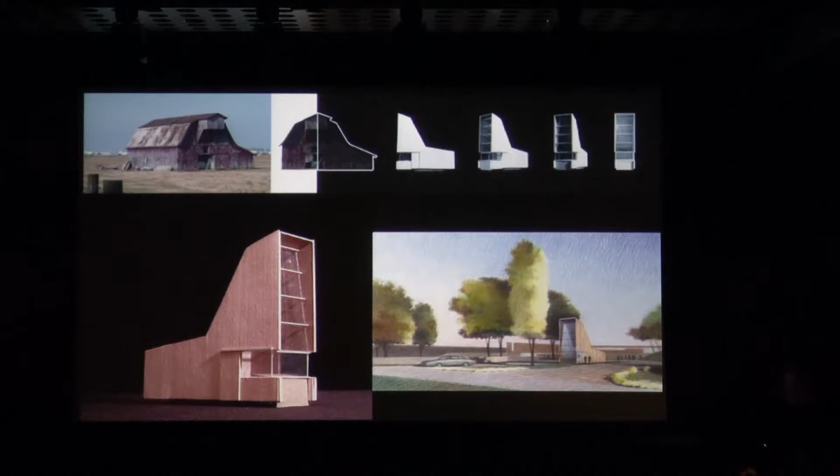I think it's safe to say that most architecture isn't very good, and most good architecture is good enough for most days. But there is some architecture, some buildings that need to rise above the everyday, and I think this necessarily challenges us to return to the significance of the everyday and revalidate it through the things that we make. So what we've been doing very much is choosing to work between the motivating forces of the everyday, where the inadvertent meets the purposeful.

We've developed this set of operations that really assist us in this task of recreating strangeness, to represent the world as it's given to us, into the world as we find it.

Simple things like you see here, of finding forms in the world, and then just by representing them, we can reprogram them. We can begin to introduce something that is at once connected to its place, but also part of a universal language, a larger global discourse. So it's a productive tension between the local and universal, and that's very much what we're after—always looking for analogous relationships between what is nature-made and what is man-made, as a source of ideas and possibilities.

Very early on, in fact even as I was a professor here, I was developing a series of prototypes. I didn't have much work at all, just out of grad school. The opportunity to teach at Syracuse gave me time to really think about how we build in the landscape, how we might begin to think analogously about things that are more inanimate—say industrial or pre-industrial—and things that are more organic, and really begin to mix and hybridize certain typologies to develop a new way of occupying the landscape.

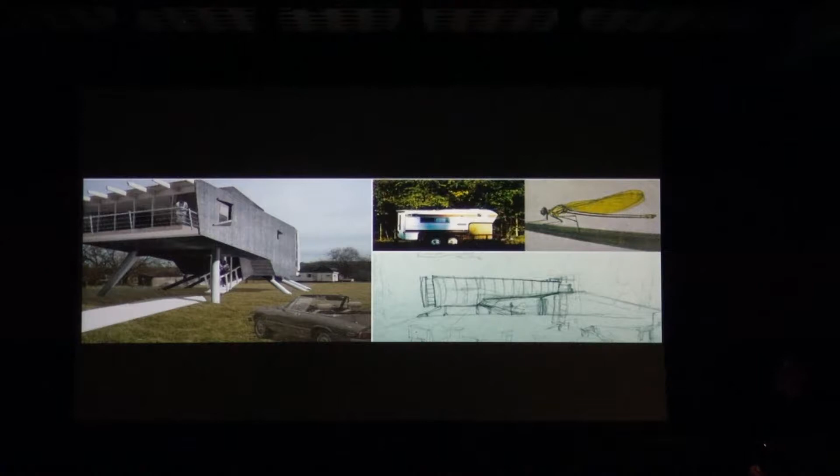After 20 years now with the firm, we've started to look back a little bit at the evolutionary typologies that have emerged here, with the idea that typologies are in fact evolutionary. They are dynamic and adaptive, not fixed. I think when they become fixed, that's when the new urbanists step up to the plate, because it really becomes more about style.

What I'm interested in is how things adapt in the face of environmental, social, or technical change. So we're looking at certain progenitors here, the shotgun house, the villa, these sorts of things, and other organic systems that aren't architecture but have an architecture, and how they began to influence the work, how the ideas embedded in these early projects began to develop progeny, you might say.

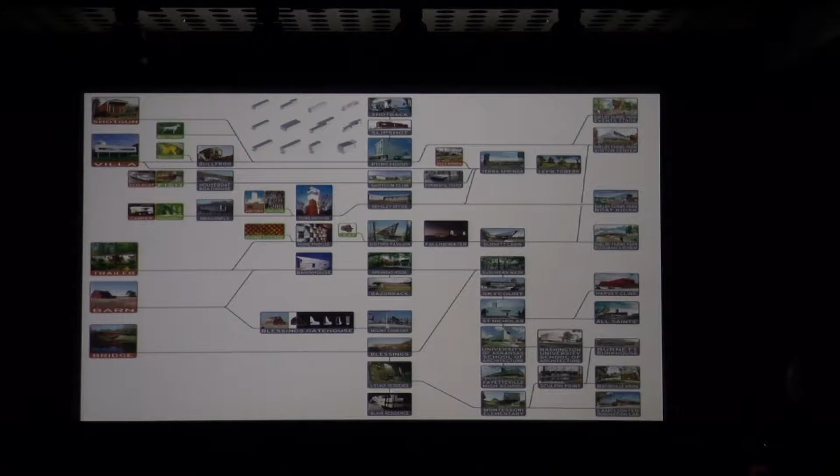Most people only have a couple ideas anyway, and you rub them together like two sticks, and different types of fire come out of that. This is just an ongoing project, but it's a nice way for us to begin to understand this family tree that's emerging from our body of work.

Always thinking about that relationship between the ideal in our discipline and the more improvised in our discipline, and realizing that in some ways they're not so far apart, and how we might work between.

So that line of thinking has led us to a variety of small, early projects that are now really informing the latter projects. This is a small honey house for a beekeeper in North Carolina.

A woman I had done her house 10 years earlier, a former girlfriend's mother. So just for the students there, if you know the relationship goes sour, you get dumped, you get asked to be a friend, just consider the possibilities. Don't reject that. So I got to do her house, and then later had to do this small honey house.

It's a simple structure, a $40,000 structure, but it was a test for me to see if architecture could happen at any scale.

So we really looked at one primary element, a beautiful load-bearing wall made of quarter-inch steel plate and faceted glass, that could act as a brise-soleil, and act as a place to display and store the honey. It really came out of looking at this rationalized process between the beekeeper and the bee that's evolved over centuries.

I was particularly taken by the frames where the brood chambers happen in the bottom of this diagram of a bee box, where the eggs are laid by the queen, and the other chambers up above, the frames where food is stored. And the way you neutralize bees with smoking, you remove the top of the lid, and you can remove the honey without disturbing the brood chamber.

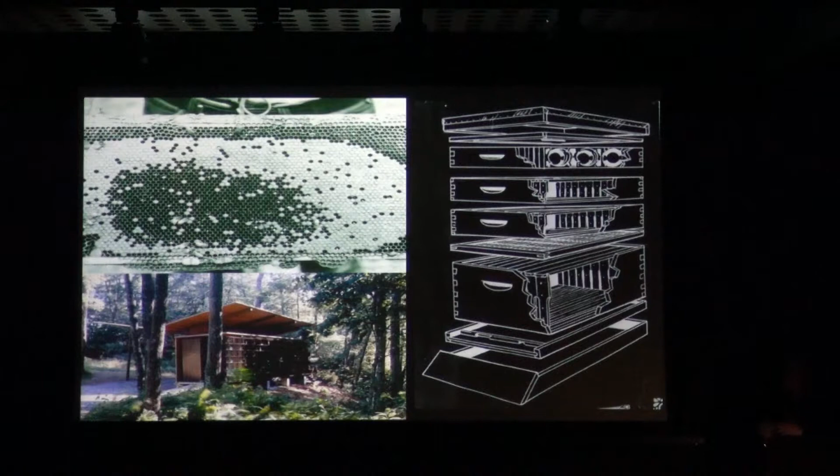It's clearly a wonderful kind of system of logics. These Cartesian frames delimit the activities of the bee, but they don't really change the way the bee is genetically programmed to behave. I love these contrasting systems working together, which help us think about how this wall might evolve as a deep surface, a very systemic kind of structure.

This is a load-bearing wall, made primarily of voids, but acts for storage and display of the honey itself. In fact, developing these deep surfaces also allowed for the forces of nature to imprint itself upon it, so we have small animals and insects that nest in these voids.

Another project that brings it back to Arkansas a little bit was a 7-story tower house in Fayetteville, right in the city limits. Once again here, drawing upon the local vernacular, or what one might say is more of a pre-industrial or industrial vernacular, even emerging, and then drawing from my own experience of travel in Italy and places like Yemen.

Culturally, the idea of living in towers is quite suitable to the terrain and to the way in which society is organized. In this case, we were very interested in how this tower met the ground, so we took an inventory of the site, looking at the patterns and textures provided by nature, especially the striated bark of the white oak and hickory.

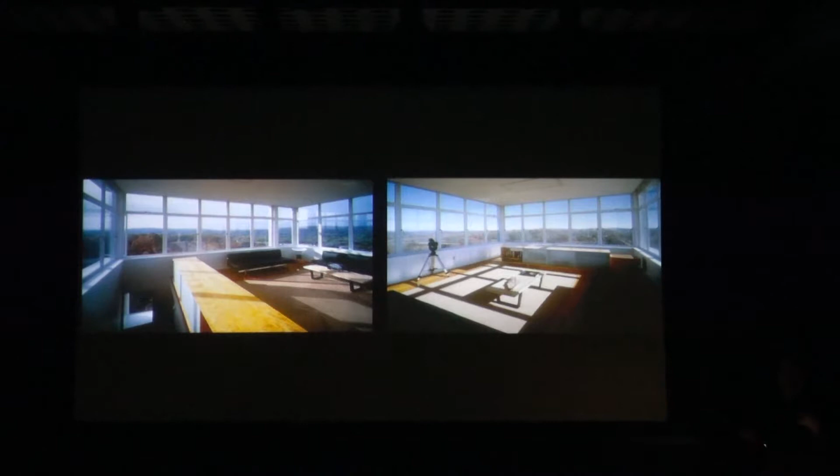Out of the ceiling comes a stair, and you move up into a sky court, which is a room open to the sky with controlled views to the landscape. So there's a wonderful kind of tension between these two ways of living up above the trees.

Moving forward into another type, which is the traditional American golf clubhouse—we jumped from these smaller projects and had the opportunity to do a more public project, even though it was a private clubhouse that certainly sat right on a public highway. The owner had asked us to come at it very differently. He said, 'I don't want another one of these clubs that looks like a plantation home or a hunting lodge. I want something that looks like it came from our place and is part of the 21st century.'

So we developed a very simple footprint, a copper box sitting on locally quarried dry stack stone from Paris, Arkansas—timeless materials of stone and copper, yet preserving the traditional rituals of the game itself.

My first response to him when he approached us about this was, man, I don't know if I can do this, I don't know anything about golf. And his response was, 'Well Marlon, it's really not about golf, is it? Isn't it really about people and space?' And I was like, yeah, I can do that. So you get educated by your clients quite often.

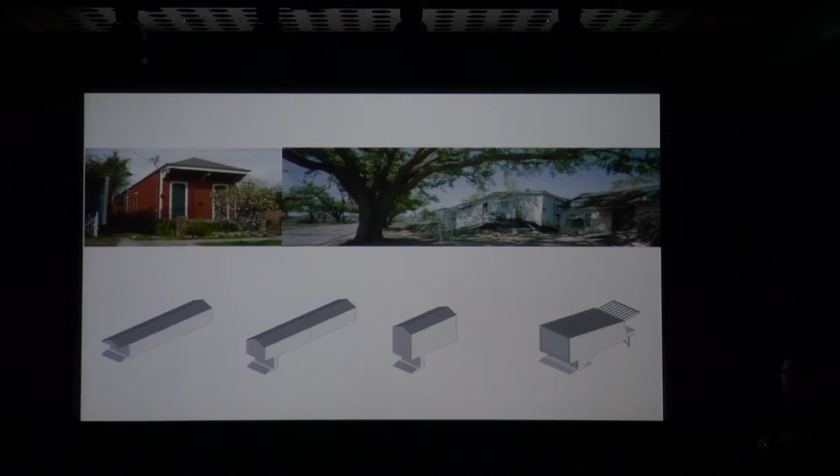Our prototype, selected by a single man and his 3 children who had property there, was born out of an existing type already, the shotgun, where the porch is the social interface between the private world of the house and the more public world of the street—a very important component of the fabric, especially in the South. Our idea was to keep that porch intact on the ground level, elevate the program, and stack it to get a more concise footprint, minimizing residual space, just using what you need at the ground level. That evolved into what we call the porch dog, built for about $130 a square foot.

These are prototypes that can be repeated, very unlike the Make It Right program, which are essentially a series of unicorns built for an exorbitant amount of cost, then subsidized for mortgages. You can't repeat those; they're too expensive. This is a 1,500-plus square foot house, using very simple strategies: making this metal box container, perforating the stairs that come from the outside to the inside, so as the water rises it pushes through the stairs rather than creating pressure that might blow the doors open inside. We let the folks, Richard and his family, decorate it as they please, and I think it's better than most of the stuff we do.

And then thinking about what it is to go through a storm like this—so many people died in Katrina because they didn't want to leave, because they didn't want to risk losing everything they had to looting if they did leave. So in this case, we use sliding perforated screens that can be opened and closed for control of the sun, but they can also be locked in place, on all sides. So you can lock the place and leave before a storm hits and feel secure that things inside are indeed secure.

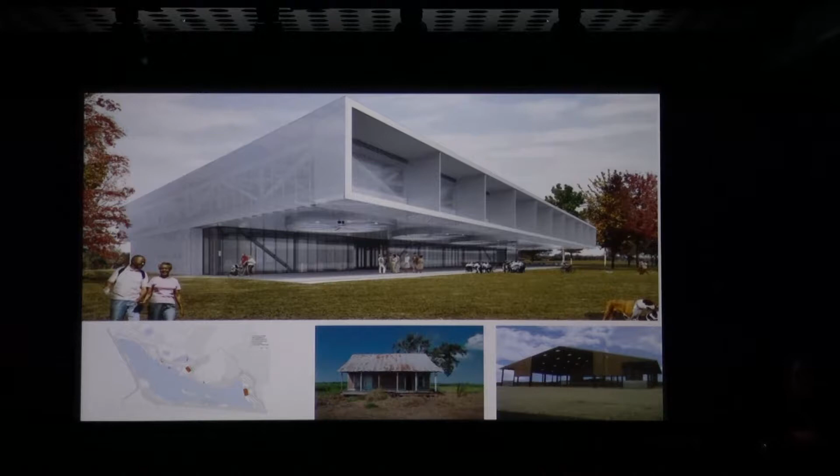This is the visitor center. It's all made out of bar grate, with about a 40-foot cantilever. It's an 8,000 square foot building with an 8,000 square foot porch, which is very important, facing towards the south. That porch is ventilated by 5 20-foot big-ass fans. So you can be in the shade in Memphis, where it's very humid and you can sweat a lot, and these fans help create a cooling effect that lets you take full advantage of being in the shade.

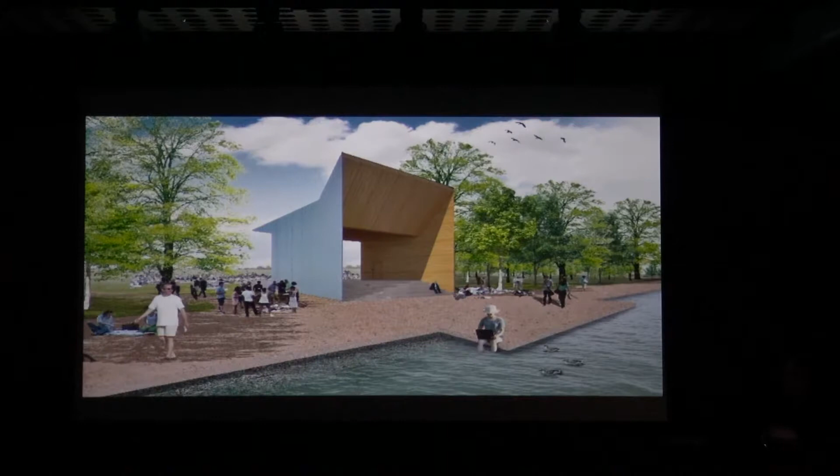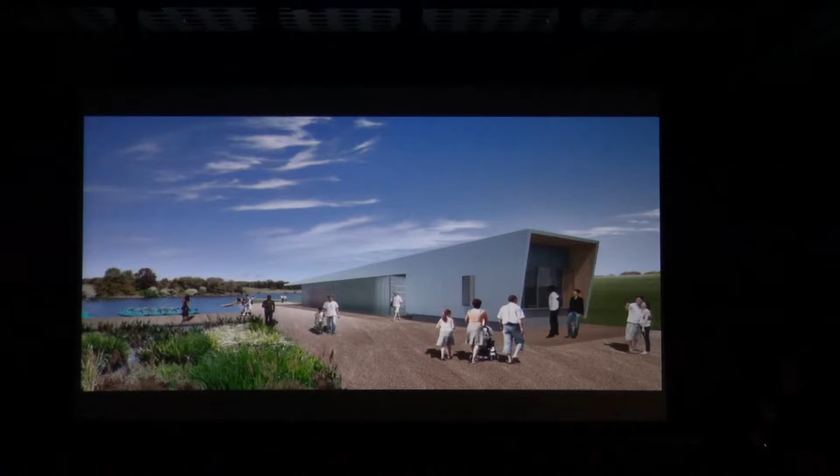Another small project nearby on the lakeside is a small pavilion for events of about 3,000 people—this is the lakeside part, and here the stage where that can happen. It's a very simple palette of materials: zinc-like metal panels with second growth cypress wood make up all the buildings, except for the visitor center, which is pretty much all bar grate and has more of a jellyfish look. This is the boathouse, with its metal grate box filled with canoes and kayaks.

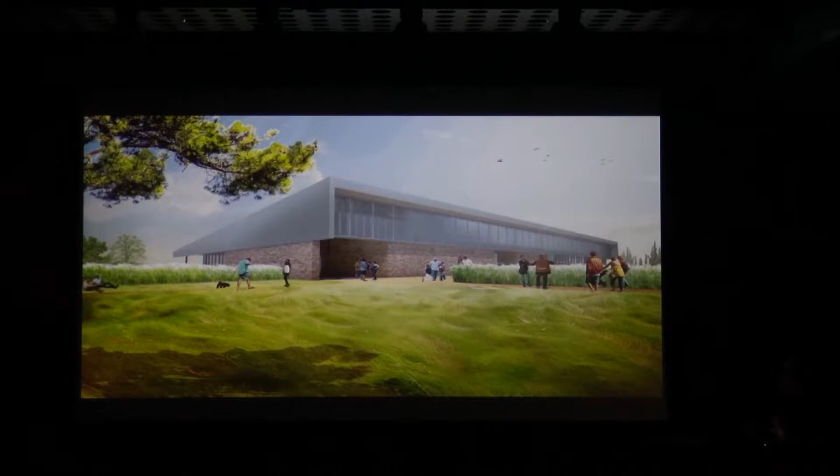Picnic tables, or picnic pavilions we call the crickets. And then the restaurant retreat center, which is again made of locally quarried stone, bar grate, and metal panels. But each building comes with its own sort of porch. This is the restaurant retreat center along the lake, again working with the conservancy to develop a transect.

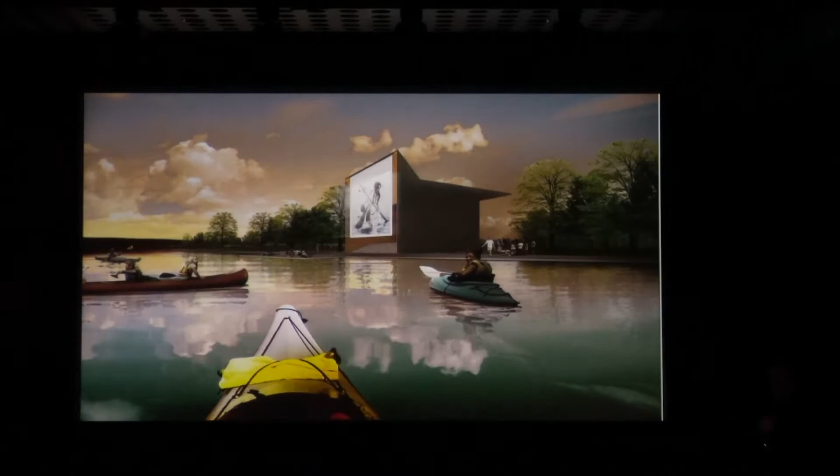Up from the lake through the walk into the building itself. We're learning very much how to work from where we already are in the local culture and its heritage, but also beginning to speculate further in a more reductive way. These start construction in March, and we're pretty excited about it. It's been a long process, but we think it will act as a nice ensemble and complement to the landscape that's emerging through the conservancy's efforts there.

So we developed a strategy that came out of trying to understand this piece of property that sits in the floodplain, where all the limitations of floodways, flood zones, and easements allowed only a triangular piece of land to be built on. So we tried to resolve everything with a box. We like to think of ourselves as the masters of the dumb box. All geometries can be resolved with a box, trust me. So the triangle, we figured out we could make 2 boxes, and kind of make a V.

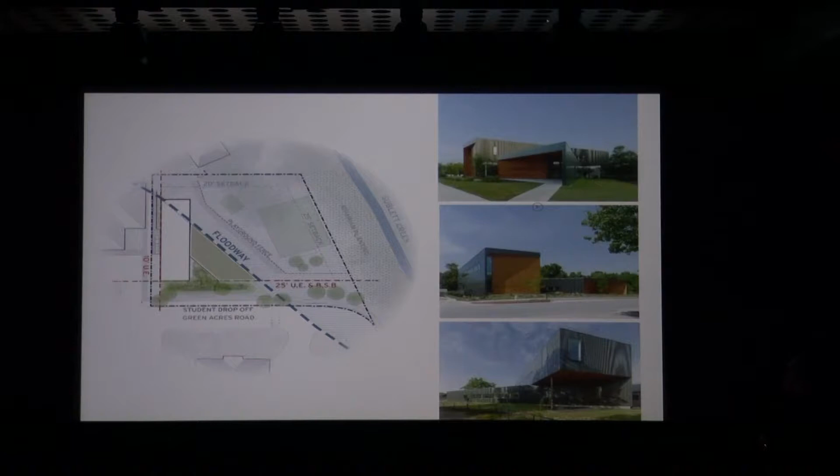There's a nice rain garden here, green roof, kind of mitigating water runoff. Simple palette, second growth cypress, box rib metal system that we use and hybridize at all the transitions, the eaves and the corners, to give it a certain level of seamlessness. The inside's really tough concrete, drywall, specific elements that are articulated just a little bit more, to bring some oomph. You get to rub a buffalo hide as you go in.

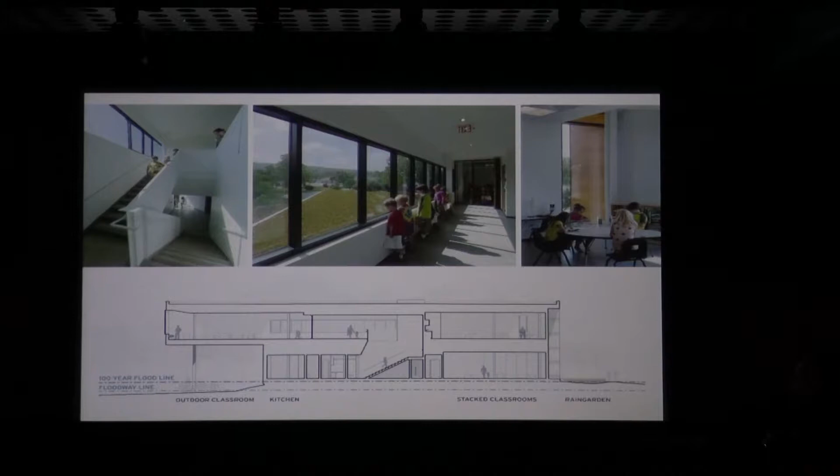Then up top, just very simple, nicely daylit spaces for the learning experience, like they do in Montessori. Our greatest sense of achievement with this project was resolving this corner, going from 60 degrees to 90 degrees with one piece of trim.

We're all BIM in the office, so we knew this was coming up, and spent a long time modeling this strange-looking piece of trim that would visually work from 60 degrees to 90 degrees. We put it in the drawings, dimensioned it, everything. The contractor still had to rebuild it 3 times because they couldn't get their head around it. But we finally got it, and it's carefully coursed and seamless. Once this was nailed, it was Miller time.

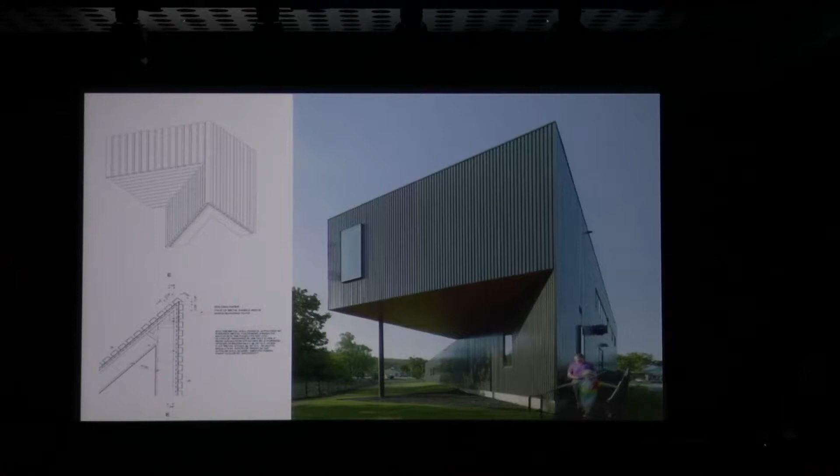It was really, in a small project like this, you have to look for the small victories, and this is what moves us away from the diagram and really gets into the realm of architecture, I think.

In Indianapolis, as Randall mentioned, we had a significant project, our first national project, completed in 2010, for an art and nature park, a 100-acre art and nature park for the Indianapolis Museum of Art. This project really was seen more as an extension of a series of pathway journeys, not necessarily a destination in itself.

We really had to struggle with the site, which is a very volatile site in the oxbow of a white river that runs right through the middle of Indianapolis, at the edge of downtown into the more suburban areas. This is the Museum of Art and a canal that also runs through Indianapolis. So it's essentially a peninsula, an island almost.

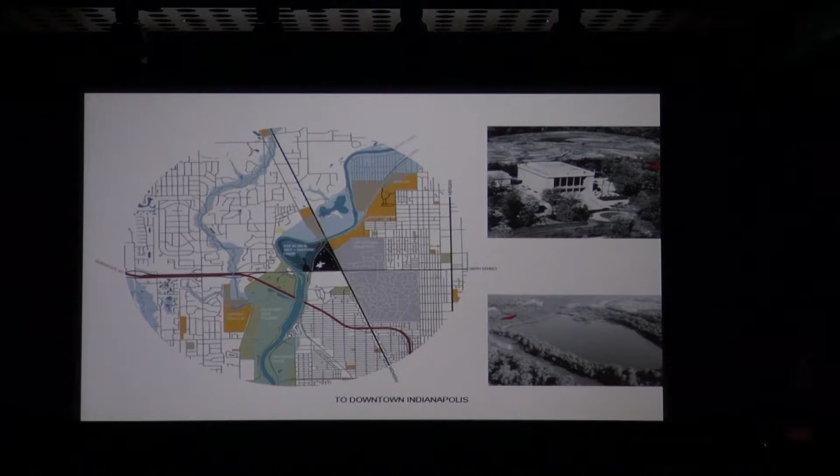In the middle of this oxbow used to be the forest, and then it became a pasture, and then it was excavated into a quarry for limestone to build an interstate through the middle of Indianapolis. That filled up with water and became a lake and an amenity in the city. So we had to deal with that.

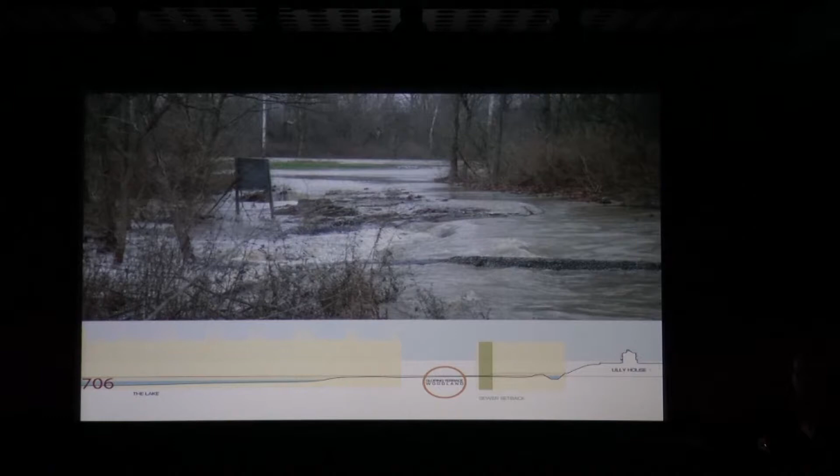Now, because of indiscriminate development upriver, this particular area has had 3 100-year floods in the last 6 years. So the river rises higher than the lake and then breaches and scours the entire site except for just a couple of places. We start with 100 acres. When you factor in all the flood zones, the floodways and such, we only had 0.67 acres to build on. So finding the site wasn't that difficult, actually. But really, there was only a place here and here in the woodlands, and a little triangular piece of land.

These are some of the many aspects of the park: the pathway journeys, bridges, and site-specific artwork by Type A out of Brooklyn.

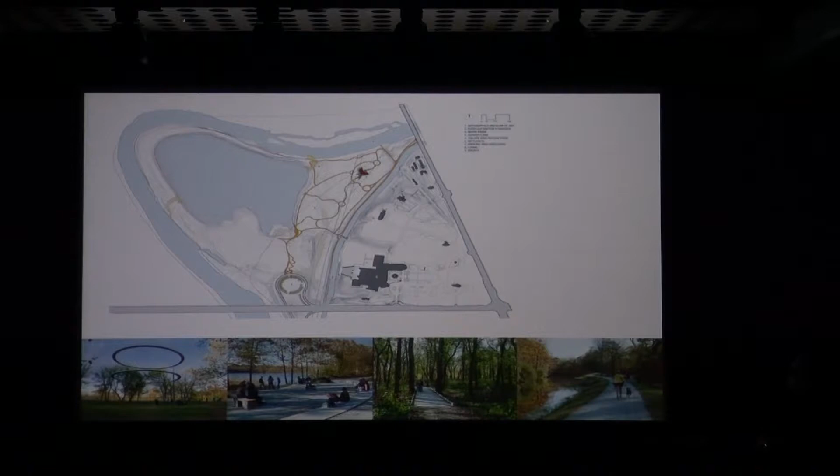Our site was wet and fecund as we found it, and then we saw it underwater. The challenge we had was we needed to raise it up 5 feet out of the forest floor, right at eye level, with little columns, which is not so desirable. So we were sitting there scratching our heads, like, how do we negotiate this?

We worked very diligently with Mary Miss, an environmental artist from New York, and Ed Blake from Mississippi, our landscape architect. He devised a very clever set of figured mounds that rise about 3.5 feet out of the forest floor, almost like Indian mounds, beautiful green covered mounds that point to particular places in the landscape with these pointed figures. Our structure would straddle this, floating just above it, and the ADA ramps would extend beyond the building and connect with the pathway journeys, seamlessly integrating it into this artificial landscape and the more natural one around us.

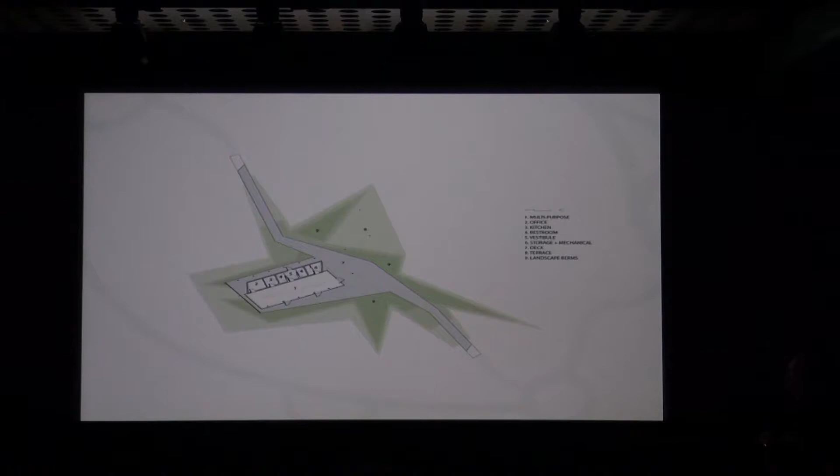And this is it here. It's very, very subtle. You really just come upon it in the woods, and then discover what it has to give once you get underneath it.

Now, we looked very carefully at analogies again, looking at microscopic images of butterfly wings, or at these leaves eaten away by insects that I kept finding on the site and pressing in my sketchbook. I loved the way the structure was intact, but there was a great deal of lightness and porosity in the surface of the leaves, not unlike the canopy of the trees.

So I began to think about a building that could allow light and air to move through it, but would be really strong. The idea was to use one material, one detail for the most part. The floor would be the material, the detail. It would fold up into the vertical wall, and fold over using the same structure and material. So in a sense, an exoskeleton, and the only thing you come in contact with is the wood members.

So this is an animation that we did to show you conceptually how it works. Students take notes, because it's just not as difficult as we professors tend to make it out to be sometimes.

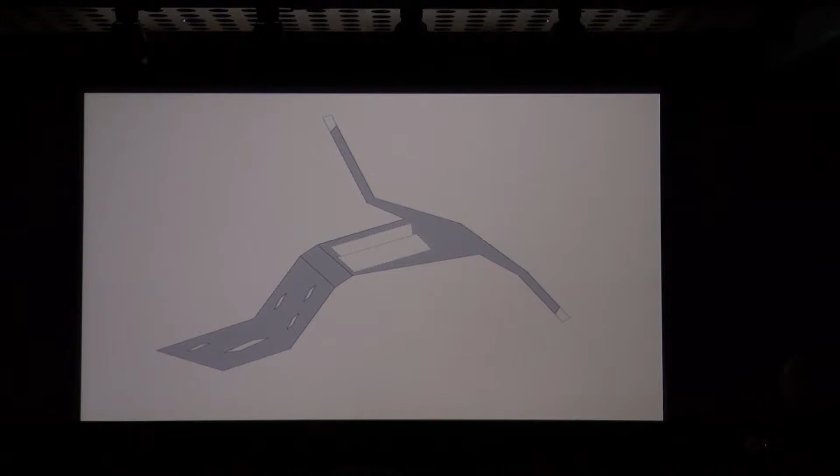If you missed it, there it is, all folded out. It's like a big tortilla, and the lounge and everything, the program, is sandwiched between. And this is the project.

Understanding the system we made, the system of articulation with the 2x4 Ipe and the exoskeleton, we could begin to pleat that system to create a variety of oculi that penetrate it for intensification of water and snow and light. I worked with a really great structural engineer, Guy Nordenson, in New York, and a great collaborator.

The goal was to make an exoskeleton that really isn't perceived except through its shadow, not so much visibly, a shadow that's constantly moving because of the way light and the clouds move throughout the day. So it really pulsates with the rhythm of the day.

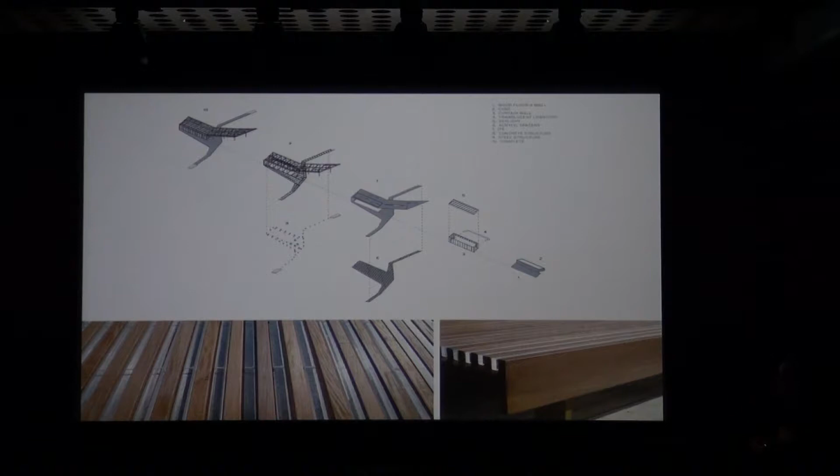Now that's something I really wish I had a video of. And to get past all the codes and everything for the floor, the deck, we basically infilled very carefully to allow light and water to go through it, but 1x2 acrylic bars that are UV rated were screwed into each piece of wood to make a composite beam, and then we can light that from below at night.

So it really begins to act as this type of apparition in the woods.

And then everything sort of comes together in this vitrine of a lounge, and then the solid box of burned cedar, which is in fact the services for the building, bathrooms, kitchen for the park. That all comes together in an interior of water-popped, ebonized white oak that's polished, with a kind of fixed finish, but then it's contrasted with this Ipe wood that will turn silver over time. So again, these contrasts of different durations of material and finishes are brought to bear here.

And then set off into its place, both the kind of weathering wrapper and the more inert box. And then at different times of the seasons and year, it begins to take on a different character.

And finally, the killer shot. You got to have that, at least my photographer says I do. This was the first, I think, national AIA winner for the city of Indianapolis in its history. So it's a kind of loved building and has been a real success in the park.

More recently, we were invited to do our first real serious interiors space, for a museum in Bentonville, Arkansas, called Crystal Bridges, designed by Moshe Safdie. The patron is Alice Walton, heir of Walmart. She has one of the most amazing collections of American art. This is the most significant American art museum built in the country since the Whitney. And it was well under construction when we were invited in to do the museum store, which is a relatively small space, about 3,000 square feet in the midst of all this museum.

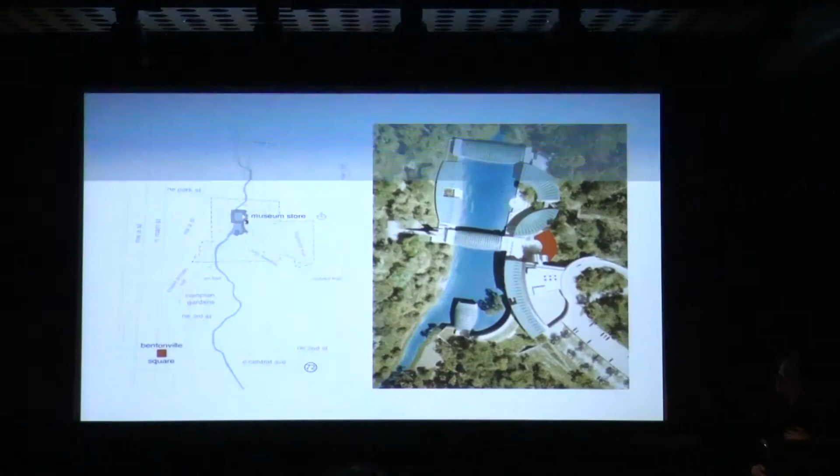But it was conceived, at least by the owners of the museum, as a retail space that would be an extension of the museum experience. This is Crystal Bridges. It sits along and crosses over a creek. It's a series of, I'd say, geometric and organic type forms. And you can kind of see that from above.

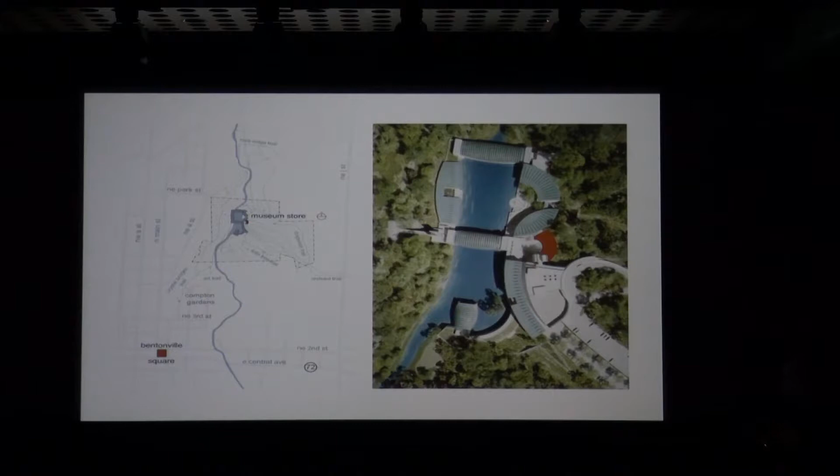Here, you enter into a courtyard in this orange area. This curved white space is where we were asked to do the museum store, near the downtown square of Bentonville, and this sort of cultural destination now in the region of Crystal Bridges. So this is what we were presented with: an empty white box, lots of columns holding up a green roof above, west-facing glass, which is really a problem—not the ideal place for a retail store.

But we were thinking more about the material culture where we're at, the great hardwood forest we have in the Ozarks, and how we might repurpose that in some ways to refine it into simple elements that could be repeated, simple units, not unlike what we had experienced in Fay Jones Chapel, kind of economy of means, because we were very limited in the budget we were working within.

So what we did was develop a carapace, a hanging carapace in a way, that reconfigured the interior of the store to various sort of scales, began to practically cover the ducts and the sprinklers and all of that, control the lighting, and allow merchandise to be embedded in it. This is all made out of 285 cherry ribs that are CNC milled directly from our BIM files.

A local mill worker had just a regular 3-axis CNC, so it was the first project we've been able to totally digitally fabricate, including all of the furniture, the gondolas, and the display vitrines. This was all born out of really looking at local artists that were going to be featured in here. We sort of saw the artifacts that were going in here before we actually really got working in the space, as part of the research.

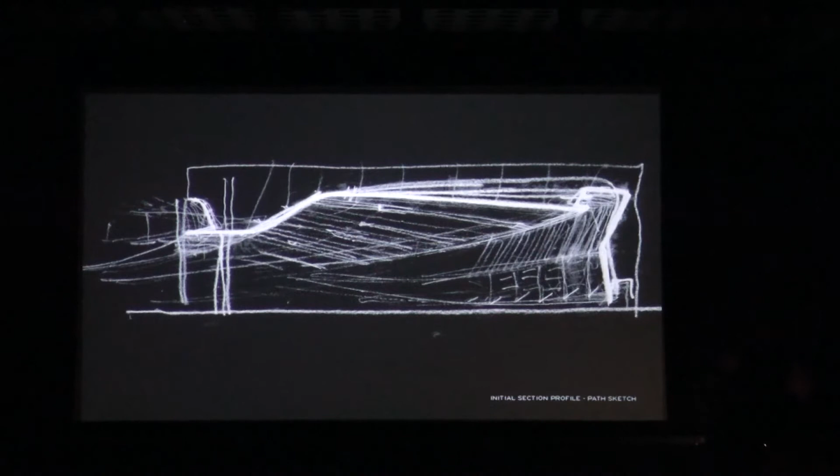So the operation of just profile extruded along a path really began to get us to think of this place as more of a container, a vessel. My early sketches were really about trying to find the right profile that could knock down 40% of the sun, begin to obscure all the infrastructure hanging from the ceilings, and embed merchandise in it.

That eventually evolved into these 285 ribs made from 465 sheets of plywood that were optimized to minimize waste, even milling in the connections. Each one different, they're all custom, and then fabricating that, and then of course the reality of it all coming together.

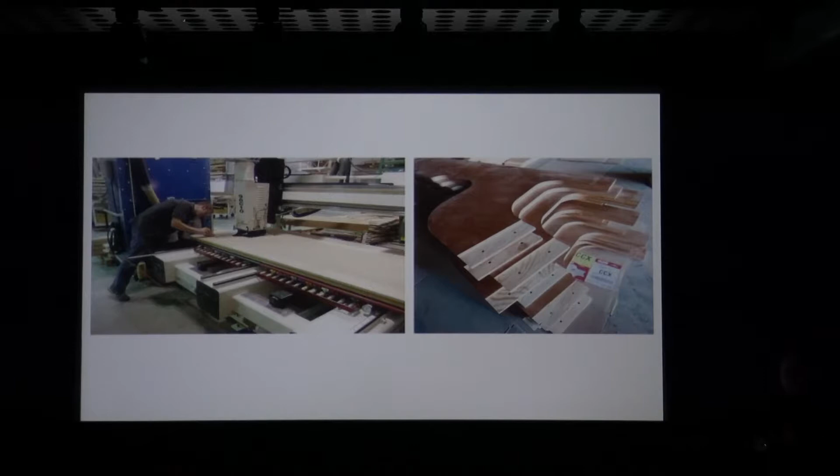There's Andy working on his CNC. This guy makes newel posts for a living, pretty much, so this is a great challenge for him. He's milling in the connections, and then the array of all the different profiles.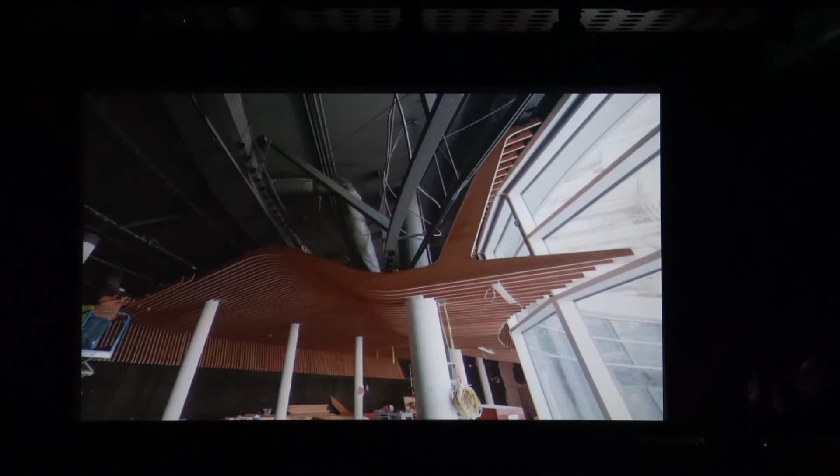The reason it had to be all custom was that we weren't working from a radial point. We were working in parallel lines against the curve in order to control the space between the ribs itself. Each one of these ribs might have several components to it. And it was put up almost by two old guys who just took three weeks to put it together one piece at a time. They likened it to laying stone in the air.

Did a wonderful job. When they were done, though, they asked us to lose their phone number, didn't bother them anymore. As you've probably been told by your professors here, if you want to be a really good architect, you have to be really good at post-rationalization.

One of the guys in the office said, 'Hey, this looks like the underside of a mushroom.' I said, 'Yeah, it does.' And so we call it the lamella. We did a few diagrams to kind of play around with that as well. But post-rationalization is key to your success.

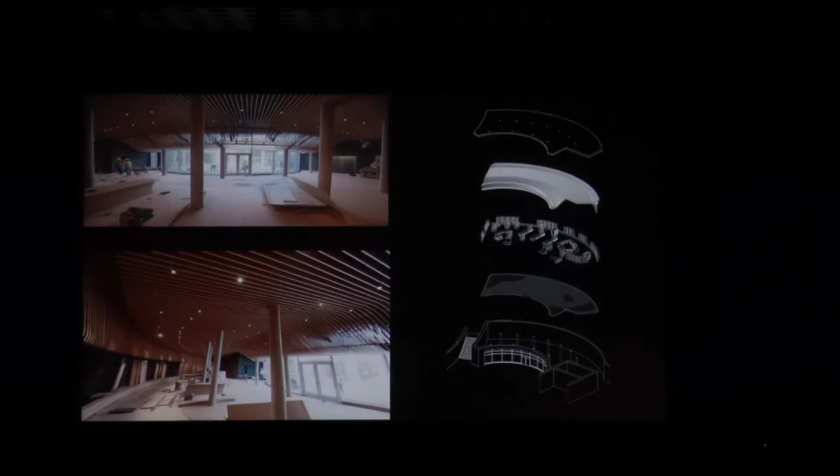We love the way the light begins to bounce around and just baffle through in the afternoons. Again, understanding this as a system, and then all the different pieces that go with that system, both in the container part. These gondolas and vitrines float with the large cash wrap that acts as the nerve center, and then all the inventory is embedded in these containers.

So everything, all of these are drawers and cabinets that you put your inventory in. What the owner loved most about this was that this store paid for itself in 4 months with the profits that it made, and it gave us the opportunity to demonstrate to quite a big patron of the arts that good design can be good business, and that has certainly developed into a lot more work with this particular family.

Now, as I said, most of us only have a couple of ideas, so we thought we had an opportunity at the Smithsonian Gallery, the Renwick Gallery, Smithsonian Institution, to transform the Grand Salon. This was an invited competition. We were down to the final 5, quite excited about it, and we wanted to take some of what we learned from this experience and reapply it in some ways.

The Renwick Gallery really is the decorative arts component of the Smithsonian, and it's in this building here, which is right near the White House. This is the Grand Salon as it exists, and a variety of artifacts. We knew we would find paintings and things like this on the inside, but we didn't expect to find all of this new artifacts and new technologies that were happening as well. So it's very current in its collection.

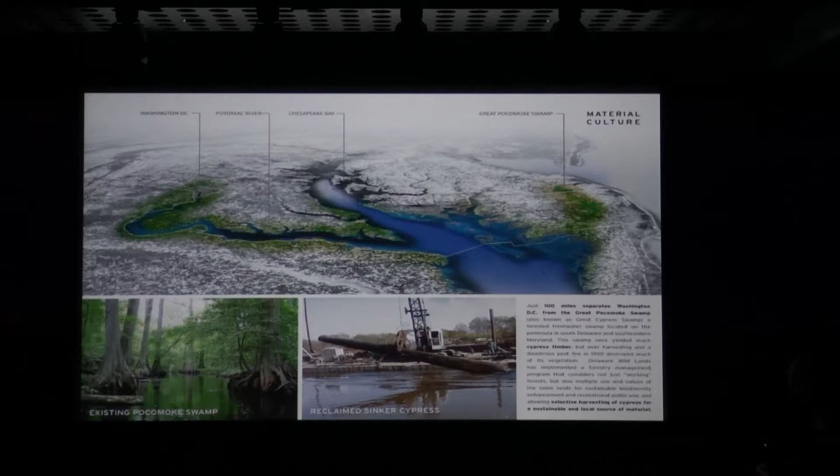We began to think that perhaps the way we would do this is to calculate how much veneer cypress we could get out of a certain amount of logs that would completely reskin the building and develop a way of lighting it and creating a canopy that it didn't have before.

So there were about 465 lanterns that we developed, 6 foot high by 2 feet. We calculated, I think there were about 54 logs, including the floor, the lumber floor, and end walls, and then thin backlit veneer that would glow both at the canopy and at the sidewalls of this space. And then again, working with Guy, with an aluminum rib system that would act as the interface between the existing wall and the new epidermis.

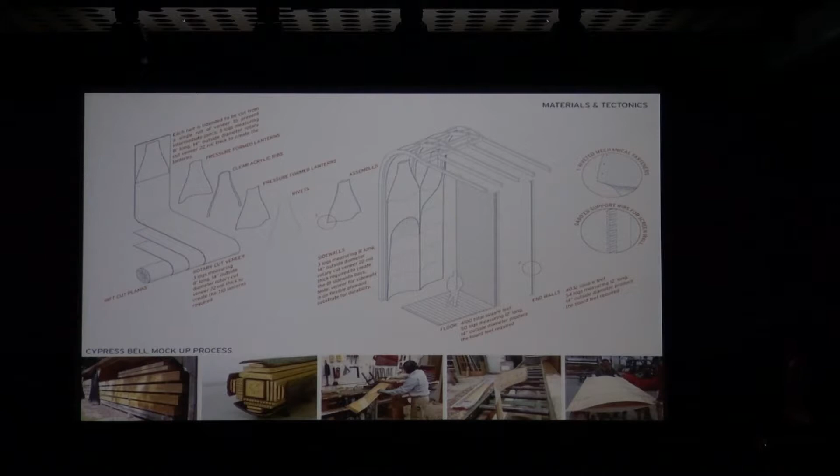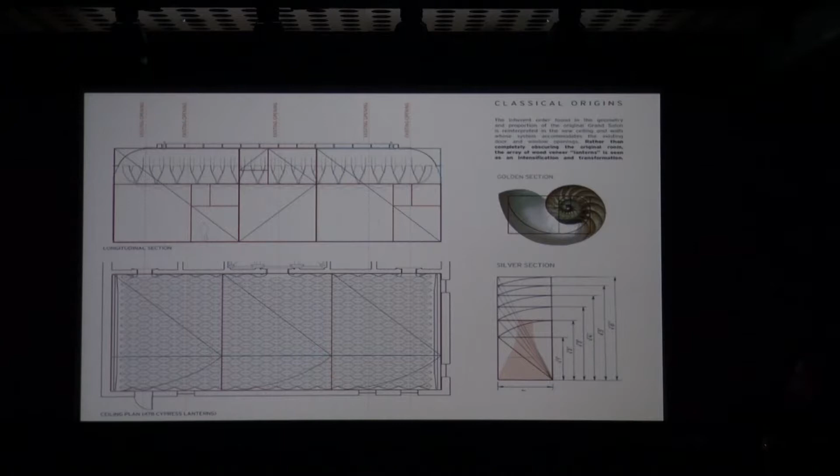And then very mindful of the classical proportions as we develop these units and the multiple of these units in their organization. And so this is the space, and then once this is all inserted, it's made up again of all the bells, all the backlit veneer.

But the trick to this is that all of these individual lanterns are on motion detectors and the actuators. So when people come in, they actually shift and move, and you can actually override them and program them for specific types of events. For acoustics, there are inserts that you put into it, or lighting. So a very dynamic space that would be kind of in some ways self-organizing, and in other ways could be programmed to reconfigure itself.

And this happens just very simple, taking a solar array on the roof, and that would supply the power to do this, and they use the excess power to sell off. This is the armature here, which has all the actuators and the backlighting.

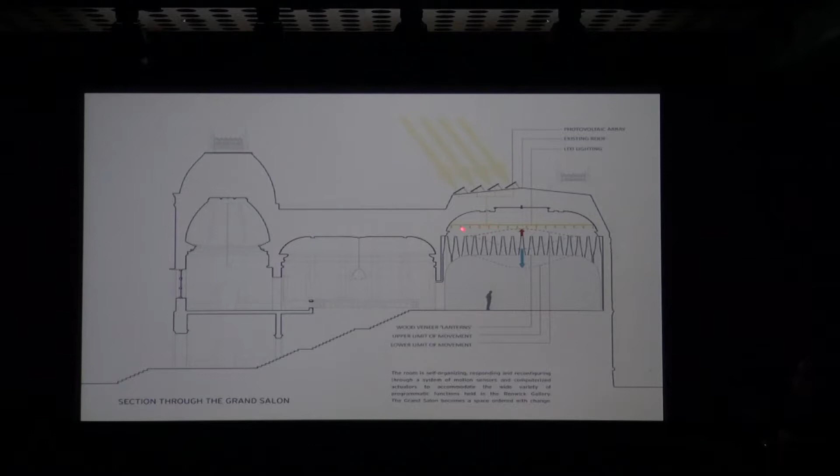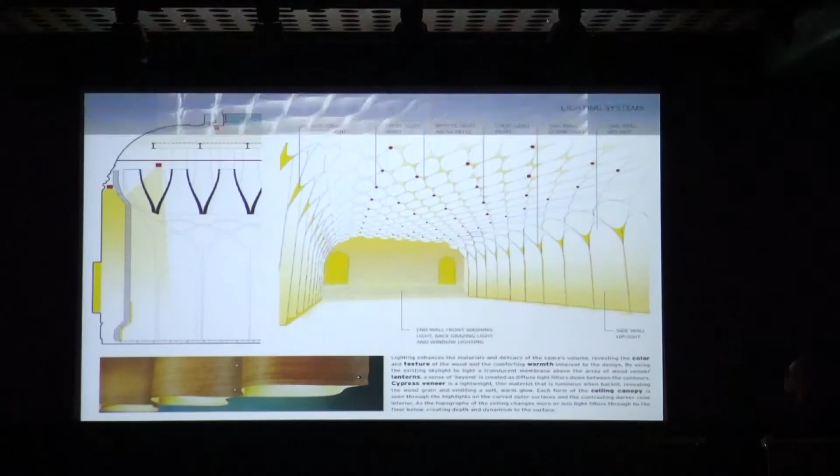There is no lighting in the lanterns. It's always between the lanterns, and then understanding the limits of movement in the space. And then working with Richard Renfro, a really great lighting designer out of New York who happens to be from Arkansas, on how we developed a strategy for getting the wood to glow and being able to control that. And then these are some of the different kinds of programs that could take place, and the different configurations.

And then after 5 years, all of this could be recycled, all of the wood, either as an artifact itself or just in another configuration.

We didn't win, so it's hugely disappointing. And what I've learned is when you don't win, when the project doesn't happen, it really becomes an investment in your spiritual savings bank, only to be reused maybe later down the road. But we learned a lot from the experience. The folks that actually won weren't even architects. They were Disney Imagineers. They had the brilliant idea of shooting images on the walls, so the ceiling could be the sky and the walls could be the streets. Anyways, it's tough for all the architects who thought otherwise.

So this idea of repurposing that I keep bringing up was really brought to bear. I was looking at some Getty images recently that are from Arkansas. Senator J. William Fulbright, I'm sure you've heard of, who was from Fayetteville, Arkansas—Fulbright scholarships—his family owned a mill, and they made farm implements, plowshares, wagon wheels, all sorts of things like that. And another person from Fayetteville, Arkansas, who was building a fine arts complex on the University of Arkansas's campus, Edward Durell Stone, was a friend. They were friends.

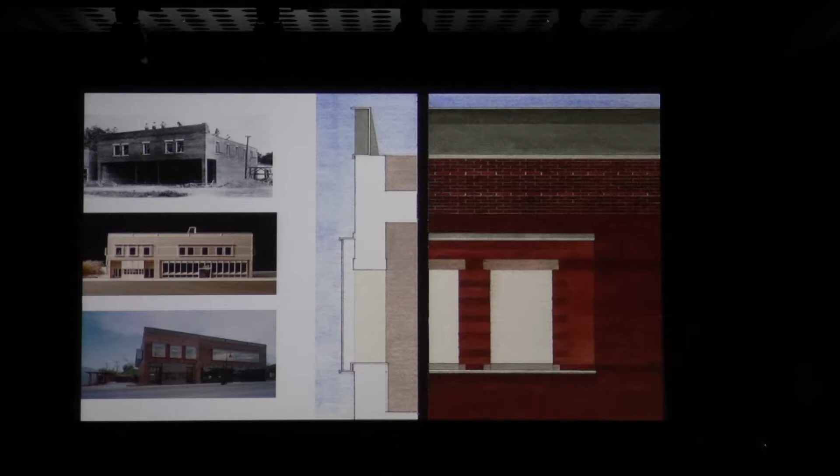So these are little soap bubble windows that actually slip over the blown out window, so we just leave it as a ruin for the most part. I'm thinking about Franco Albini here, being in Genoa and seeing some of the great things that he did. So this came right directly out of my experience as a student in the Syracuse and Florence grad program.

But I thought that would be the way we could do it, is give this project a new language. And so this is it today. We had to do this for $110 a square foot. It took 7 years to build, to get it through all the processes and the rebidding time and again, and dealing with all the small town politics.

It's a tough town. This is the mayor right here, and he owns a tattoo parlor. So the small town politics there are pretty tough, but he was one of the best politicians I'd ever met and helped guide us through this to come out on top, to keep everyone's eyes on the prize.

So simple detailing, glass hung on steel fins that are all redundant and load-bearing. We built wood forms to hold the glass panes in place, let them cure for 28 days with structural sealant, and then remove the forms, and everything hangs like big shingles.

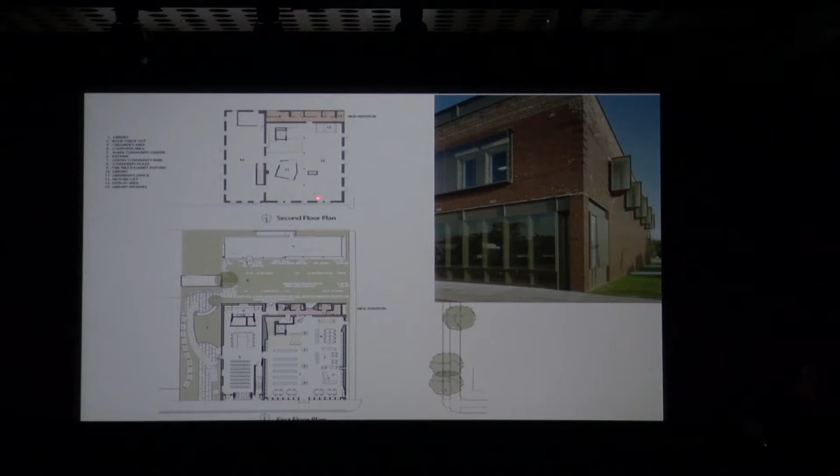This is all north-facing light. The first floor is the library and reading area, the community room, and then on the second floor, genealogy department, display of historical artifacts, the librarian's office. And at night, it acts as this nice beacon in the middle of town.

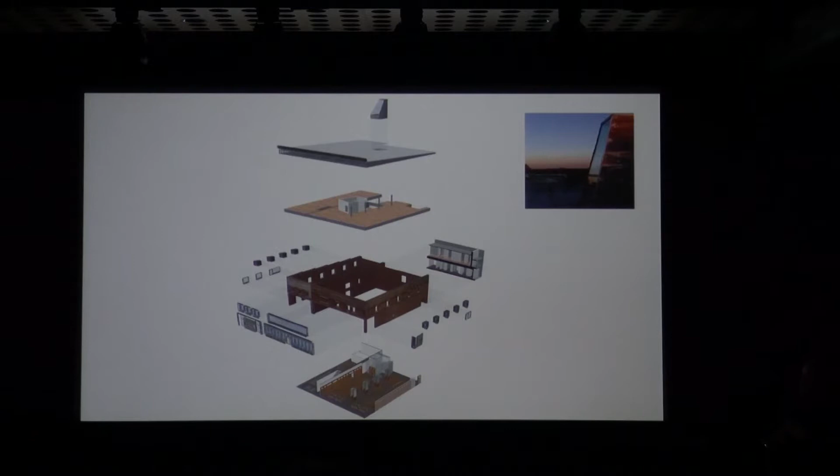And the drawing kind of illustrates what we're doing: the chassis of the building, the brick shell with some of its existing structure, and then the new elements of windows and doors, columns, a skylight over a beacon over an existing skylight, acts as a center literally for the city center, now marking that.

And again, these soap bubble strategies of detailing provide a very transparent interface between the street and the reading rooms inside, very taut.

And then thinking about the inside, we had a pressed tin ceiling, 100 years old, that we couldn't really penetrate. The mayor got county prisoners to take down each tile and number them, and then those were reconditioned—they were very resourceful, they were picked up. We had to replace all the columns because they had foundation problems. So you always got to, if you throw a little meat or a little Corb in each project, it's really good. It's like Tabasco for architecture.

So these transformations—we couldn't penetrate with light, so we wrap with books, we wrap with glass. We put light in here, we bounce the light off the ceiling. They have light in the reading rooms. The old mechanical lift becomes a display for buggies that used to be sold on the top floor and brought down and hooked up to horses. So there's lots of little exhibit areas like this throughout the library.

Upstairs, the heartwood pine floors are restored, the librarian's office, the skylight above. And then just taking something as prosaic as a window, simple window, and just reconfiguring it to grab the north light and bounce it in and bring a little kind of spiritual dimension to this library.

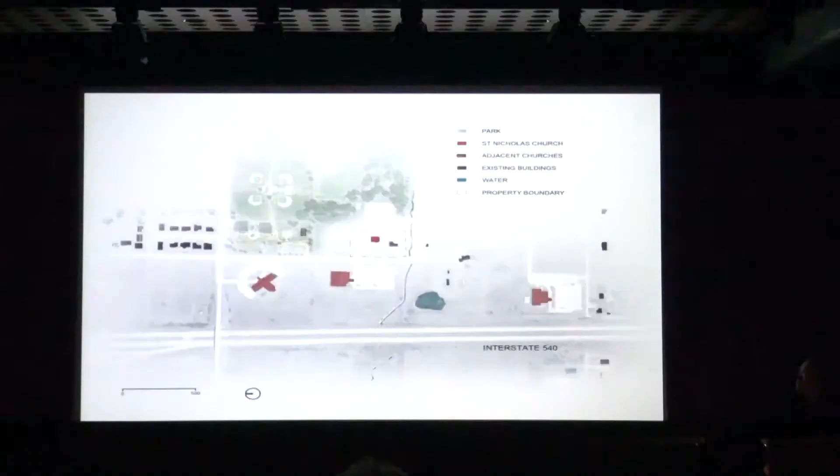The idea of repurposing, we keep working with in the most constrained circumstances. We worked with an Eastern Orthodox Christian church community who were worshiping in a rundown office building in Springdale, Arkansas. One of their parishioners died, left them some money, so they bought 3.5 acres right along the interstate, right around all these mega churches.

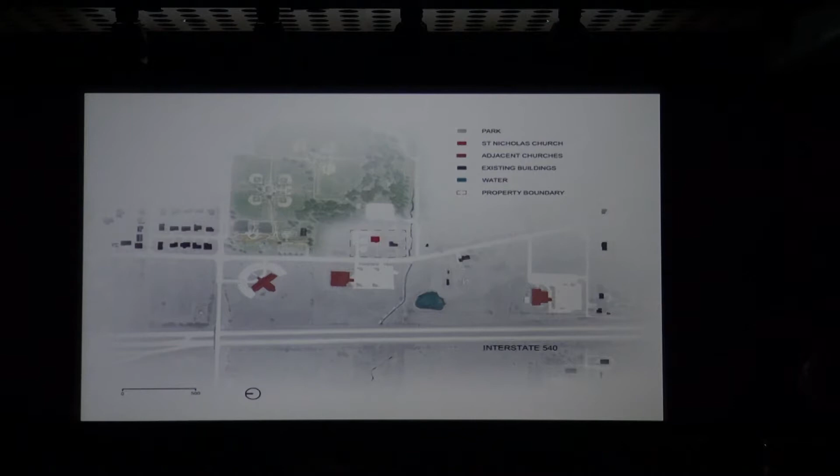But they wanted to have their own dignified place to worship and have fellowship as well. For $100 a square foot, they asked us to build this for them, which was quite a challenge, one we didn't want to embrace unless we made it out of plywood or something.

So, what you see below here are adventures in religious architecture where I live. So, hang a cross on a metal building. It's a strange thing. I've seen people on Sundays pull up in their SUVs which cost more than the building.

And certainly people wouldn't live here, so it's a funny place to worship. I was trying to make my case to the congregation that this is probably not the route we want to go. And they agreed wholeheartedly. But they said, you will have to take this building and convert it into the church. And it's like, wow, our hearts sank, like, what to do?

When in doubt, I always say, try to go back to origins. Go back to the things that are fundamental to what we do as a discipline. And in this particular case, it was scale. It was proportion. Just simple things that maybe we could make a connection to this very traditional congregation.

So we went back to the origins of the classical Greeks and developed a proportioning system. We didn't develop it, it's already developed, the golden mean. Rectangles, you hear it all the time at school, but could it really be useful? That was the way in which we made a connection as church, because it was the origins of their church, since we weren't going to be able to afford all the domes and arches and all that stuff, thank goodness. So this is the church that came out of that.

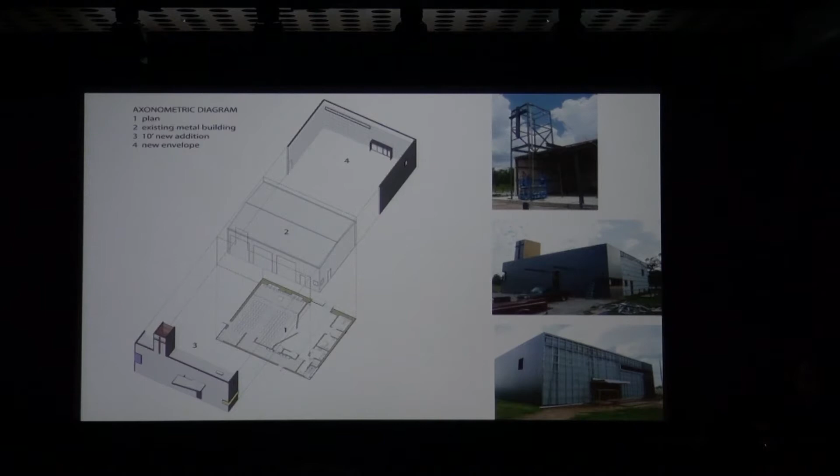And then a little bit of Corb here, and then we light it up at night. It becomes this nice billboard in the evening. Section through that addition: Father John's office, the narthex, the St. Nicholas Eastern Orthodox Christian Church.

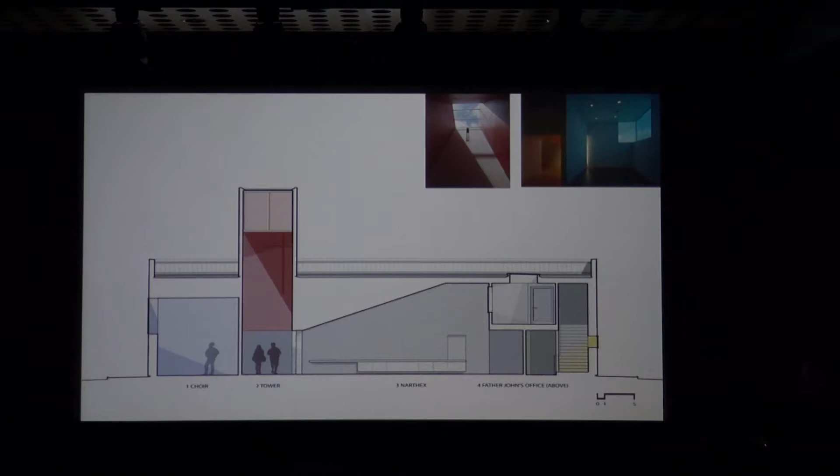The return air duct actually becomes a white oak cabinet, local white oak. There's a steel channel that acts as a beam that supports this cantilever filled with sand, and then candles for you to pick up as you go beneath the skylight tower and bathed in the blood of Christ before you go inside. So very simple.

And then moving into the space, Father John and his congregation, the iconostasis is made out of angle iron, and we made one cut on the east facade to allow east light to flow in during the morning. And then, the altar and how the light works with the icons and the saints here.

One of the big challenges for the church was they had to have a dome. We explained to them, you cannot put a dome on top of this metal building because you have to cut through the superstructure, everything falls down. So they allowed us to put a dome on the inside. The problem was we only had $100 a square foot. We didn't have money for a dome.

And the contractor didn't feel like he could make one that would be really nice. He was a member of the church, but he had an idea. He knew a guy that for 2 cases of beer, we could get a satellite dish.

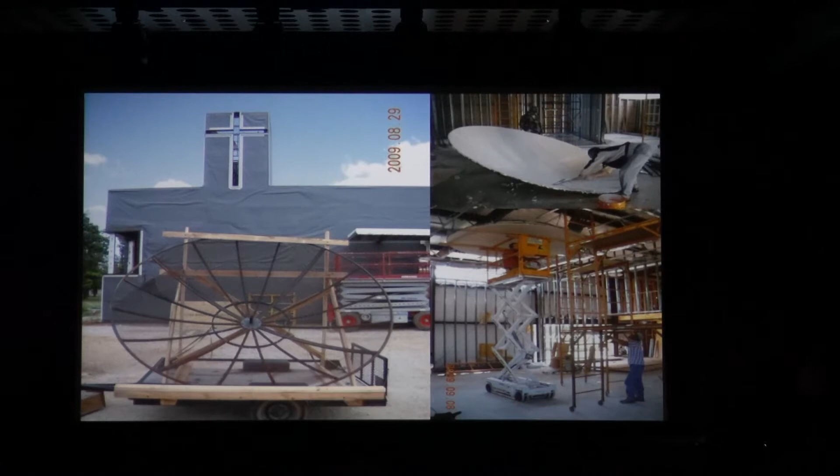And we were in the middle of building this thing, so 20 miles out, this old metal worker had this satellite dish, and we got our company car and drove it out to the site. It's its own lath, naturally, and we skim coated it in plaster and jacked it up, and they have their dome. So that's how we roll.

One of the building committee men was so excited about this process. He said, I know where we can get a bishop's chair, and I can get it for free. It's walnut, it's big, it's like a throne, with crushed purple velvet upholstery, and I can get it for free. I said, oh really, where? He said it's from an ad campaign with a local liquor store, but they said I could have it when they're done. He goes, I just don't know what we're going to do with the embroidered CR on it. I said, what do you mean? He goes, Crown Royal. I was like, wow. Then Father John overheard us, came over, thought about it a minute, and said, nope, Christ the Redeemer. So that's how things kind of roll. Anything's possible.

We got a phone call back in 2013 from the National AIA, a woman named Elizabeth Henry. She called to tell us that this had won a National AIA award. Of course we were stunned, we thought it would never happen. But she said, we did some research, and we discovered that this is the least expensive building to ever win a National AIA award in the history of the awards program. We wanted y'all to know that. It underscored to me what we've been trying to do, and I always try to tell students and architects that architecture can happen anywhere, at any scale, at any budget, and don't let anyone tell you any different, because what we're learning right here you can't put a price on. I think a little structure like this can prove that out.

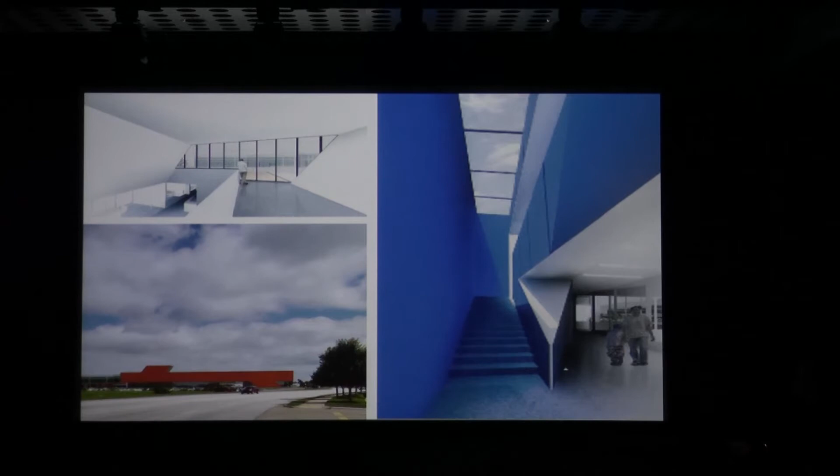So I'd like to end tonight with something not like this. This is under construction, actually under wraps. This is a pediatrician clinic for kids. We thought we'd only have 3 colors in our palette: red, blue, and yellow. So we made a red building, and it sits in a suburban landscape here. This carries forth some of these ideas of the silhouette, the icon in the landscape, with a nice blue stairway up to the clinic, and then a place for the doctors to sleep since they're on call all the time. They're up in here, and then you're transitioning here, with spec offices down below. So we keep pushing that idea of the power of just the silhouette in the landscape.

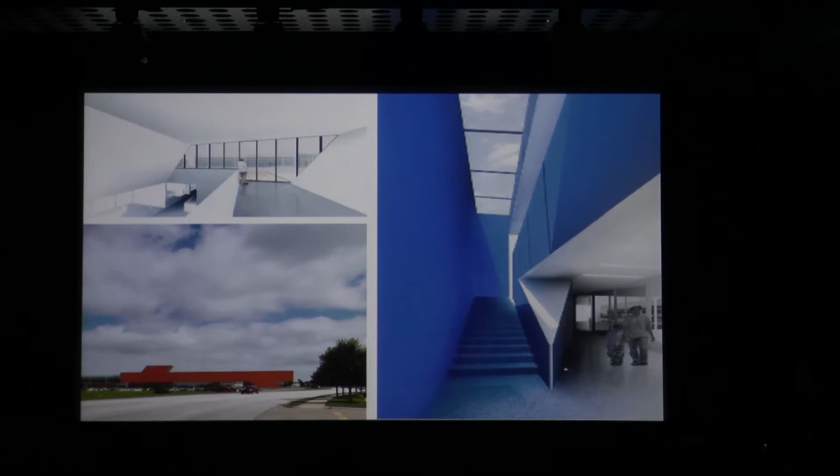But the last building I want to show you is an architecture school, the Fay Jones School of Architecture. I was very fortunate to receive the commission, along with Polk Stanley Wilcox in Arkansas, to renovate an older building, much like this one, built in the 30s, where our architecture school had been for 40 years. It's a Beaux-Arts building, but we never had room for landscape or interiors, so this is an opportunity to get everybody under one roof and add 35,000 square feet to it. It's a 100,000 square foot project, and a great opportunity to look at how we take the DNA of something that exists and speculate on how it might evolve, then search for that condition of resonance between the two. This is the east face of that Beaux-Arts building.

The only requirement by the university was that the new addition had to be the same width and length as the existing building, and we were to add to the west side. To achieve this, we really had to core out the middle of the building, because that's the place you could never get to, since it used to be filled with books with 7-foot ceilings. There was a central axis you could never thoroughly experience. This is right in the middle of campus, so we basically core out the center, reprogram that, and then add the new addition, which creates the new figure in the middle of the campus.

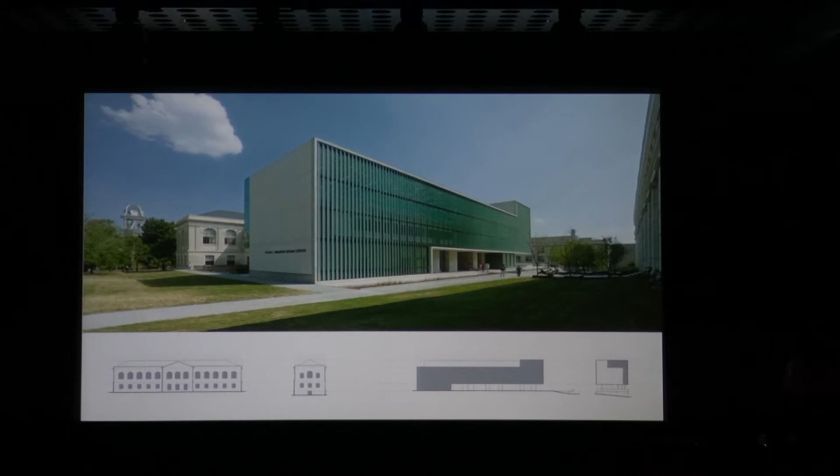And that was something that the Design Review Board bought into, thankfully, and allowed us to proceed ahead.

And then we light it up at night, so it acts as this type of jellyfish, and you can really begin to see what's going on inside, because as we all know, being here in Slocum, everybody wonders what the hell is going on in there. It's all lit up all the time, and you can't see in and all this. So this is our way of opening it up to the community, the larger community of the university.

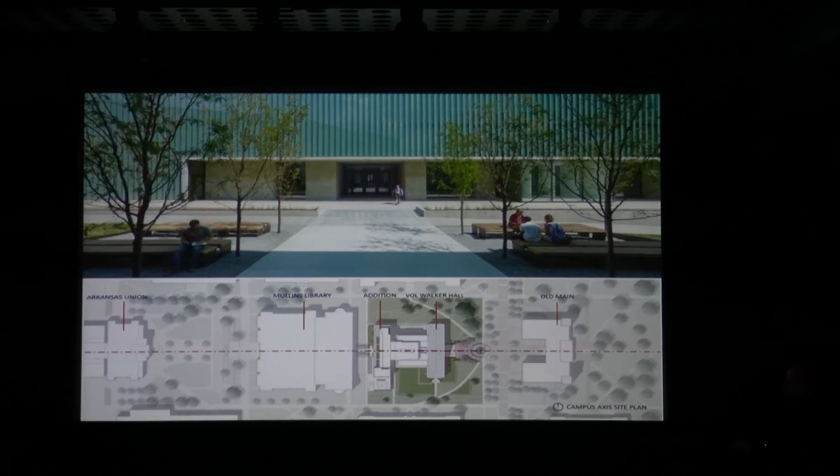And then creating a new entrance on the west side, and really opening up that axis that runs all the way from Arkansas Avenue through Old Main, through our building, through the library, through the plaza, the Union, and all the way to the football stadium. So now it's something that becomes a throughway for everybody in the community.

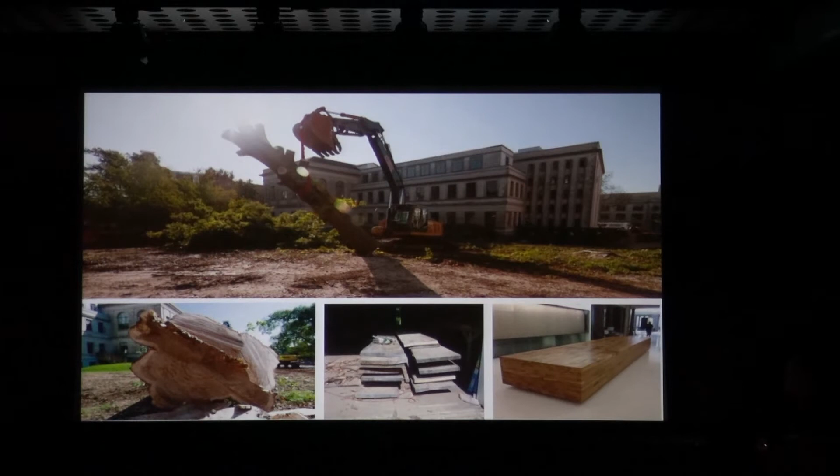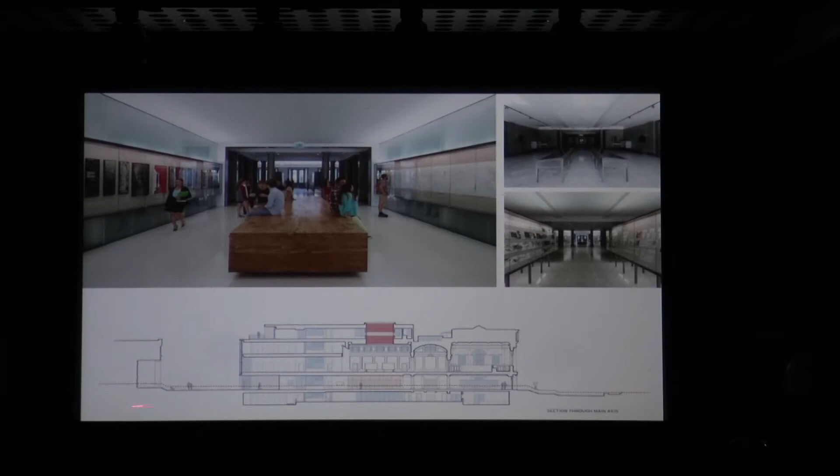And we had to remove several 100-year-old oak trees from the new addition. So we were very careful about how we cut those, limbed them, carved them into lumber, and then repurposed them as a 5.5-foot by 25-foot long table that sits in the center axes of the school, really becomes part of the social space of the school, and a series of vitrines along the axes to display student work and announcements. So it's a very kind of active social spine of the school that runs all the way through and allows the public to interface as well.

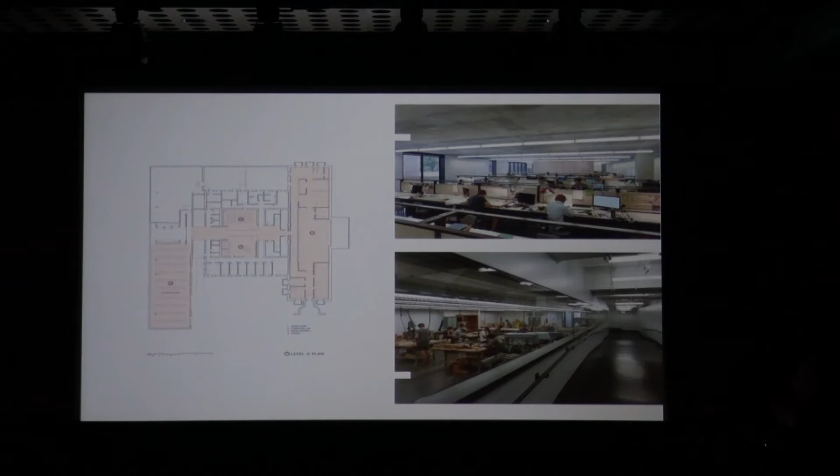In the basement level, we've got all the, it's the candy store like you have here, the shop, the Viz Lab, the vacuum machines, the 3D printers, as well as in the new component, these exposed concrete studios in the lower level. The upper level, we have our own exhibition gallery that can be secured for the first time.

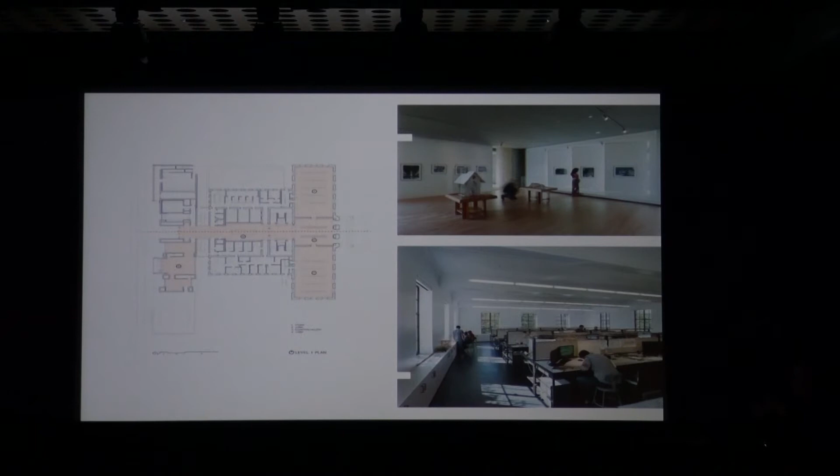Our first show was a retrospective of Fay Jones, and then reconditioned windows and plaster for the new studios in the old building.

On the second floor, the old reading room here is converted into a studio with custom lighting, custom desks with built-in LED strips, new classrooms, as well as the central gallery that pretty much like you have here, where all our major reviews take place, and it's the main kind of nerve center of the school.

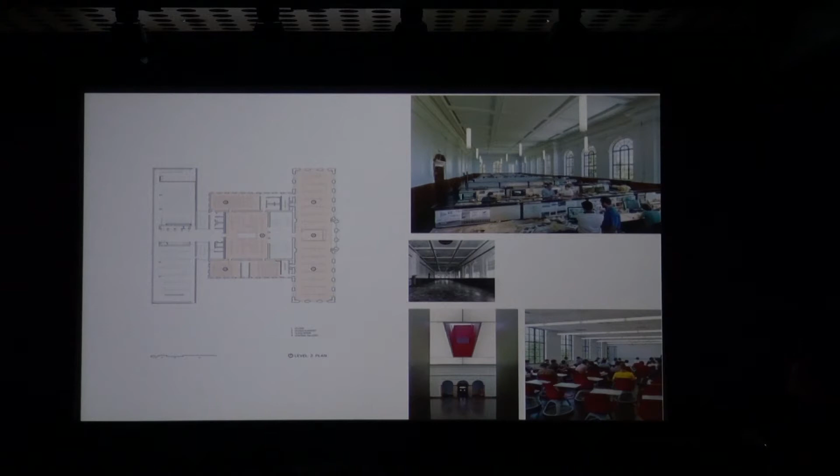So this is really where the old and new kind of overlap here. And this was a space that we had a lot of acoustic problems and lighting problems.

To resolve that, we worked with a NewMat system, which is a fabric ceiling that could be stretched across the entire 2,500 square feet of the room, backlit. It was like a giant lampshade, and then skylit on the sides. And this fabric is perforated, so it resolves the acoustical issues.

And then we took out this west wall and then rebuilt it to match the existing detailing of the older building. And then carved an oculus through the new studios we added on top, so that they would have a window to the sky in the middle of the school that becomes very dynamic as the sun moves. It always registers another quality of light depending on what's going on outside. So, just a nice restoration of existing older spaces.

And then one slit right through here that allows all these rolling panels to slip out, be stored away, and convert this into a more multi-purpose space.

Tried to figure out how to deal with a 200-foot long west-facing facade and how to deal with the sun control, and it became very evident that we wanted to deal with it passively. So we worked with a company out of St. Louis to develop a fritted glass fin brise-soleil and a custom curtain wall system, all made out of steel sections.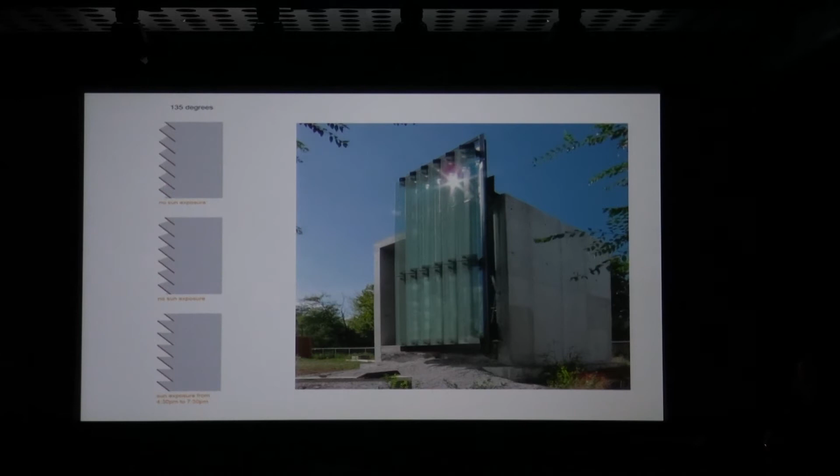And again, just exposing the post-tension concrete, and then at night it just really gets to open up and allow for that transparency.

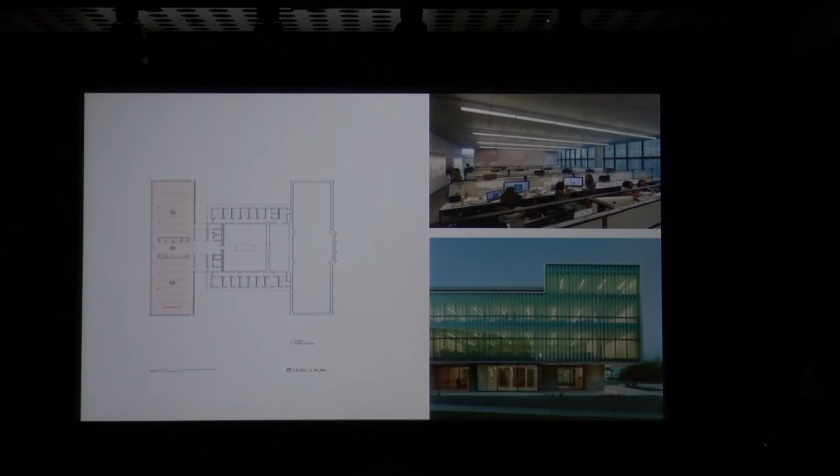To create the formal joint between the old and the new, we use that joint to fill with program, which is the required new exit stairs for the building, that act as vitrines and social spaces here.

Then more crit and review spaces, decentralized all the printing, because all that's behind these sliding doors. All the plotters are in each studio now.

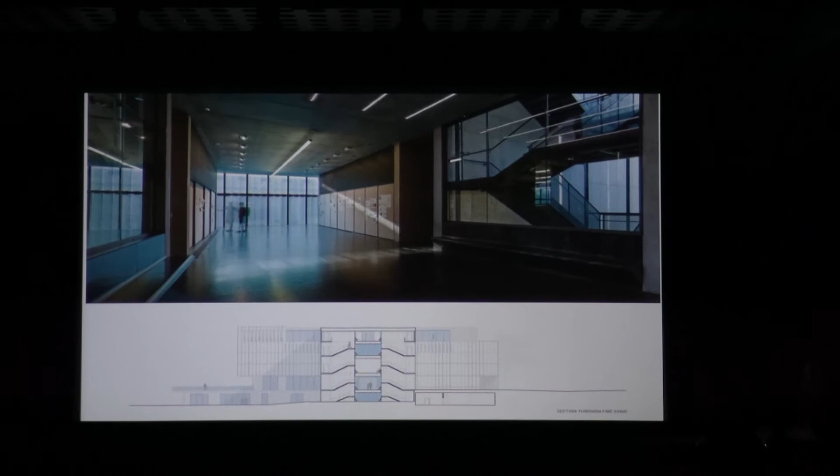with folks here. So a grand learning space, and then our student lounge underneath the rake of this. Here we call it the boneless chicken ranch, because every time you come in, the students are all sacked out in the beanbag chairs.

We have showers so they can take showers. Problem with that is we had 2 students living there rent-free, that we had to kind of monitor a little bit better. But it's a split-screen system.

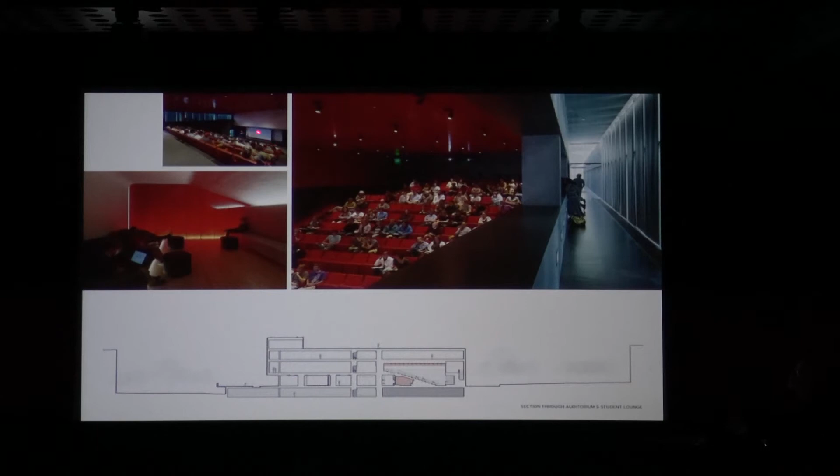This came up because I was teaching at Cornell, and I really liked the new addition there quite a bit, but it's kind of sad that the first 5 rows of the auditorium you can't sit because they didn't resolve that. So we have 2 screens here, and that allowed us to steal some space behind this screen and have a faculty lounge to where faculty can go and gossip about the students.

And then up top, green roof, Ozark Sedum Laboratory, faculty offices, seminar rooms, a covered outdoor classroom with a place of refuge and prospect.

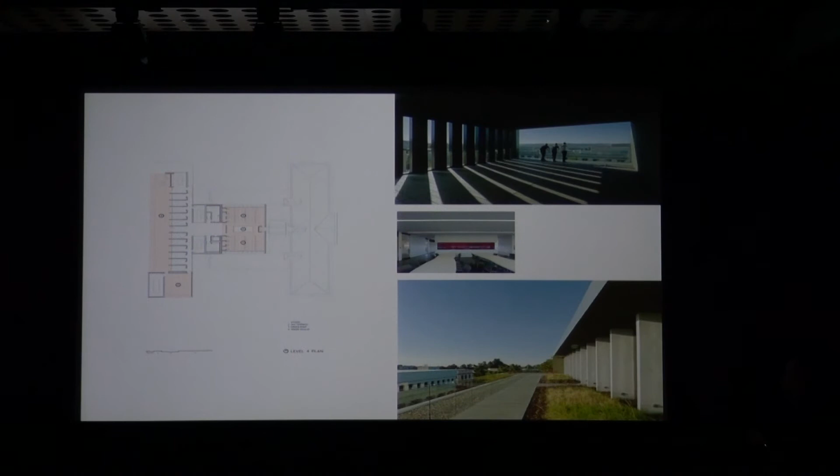And the last space that I always try to turn the students on to—I tell them, when they've been up for a few nights straight, rather than drink 5 Red Bulls, just go upstairs, stare into the Oculus, get charged up, get ready to go, right?

So, anyways, I really appreciate the opportunity to come back here to Syracuse. I want to say that my education under the program here was transformative for me, and I think the opportunity to teach here was even more of a shaper of who I am and how I think, and I appreciate those opportunities, and I'm happy to take any questions. Thank you.

I may have talked too long. Do they do questions here? Okay. Looks like they all want to go. This is wait for them, it's a little settling. Yeah. I can only take 3 questions, so I only have a couple more hours I can spend with you.